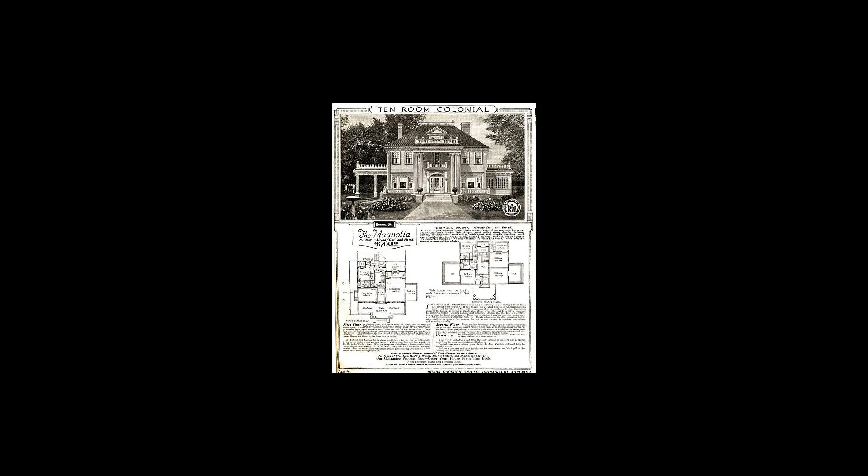Kit houses, also known as mill-cut houses, pre-cut houses, ready-cut houses, mail-order homes, or catalog homes, were a type of housing popular in the United States and Canada in the first half of the 20th century. Kit house manufacturers sold houses in many different plans and styles, from simple bungalows to imposing colonials, and supplied at a fixed price all materials needed for construction of a particular house, but typically excluding brick, concrete, or masonry, such as would be needed for laying a foundation, which the customer would have to arrange to have done locally.

Design: stick-built, balloon-framed kit houses were built as permanent, not temporary structures, as the manager of the Sears Roebuck Lumber Department explained to a United States Senate committee in 1919. A ready-cut house should not be confused with a sectional portable house, which can be taken down and moved by being unbolted. A ready-cut house is a permanent house, and the method of its construction is not different from any other frame house where the lumber is framed, or cut to its proper length, notched, etc., by hand by carpenters, unlike modular homes, which are built in sections at a factory.

In a kit house, every separate piece of lumber was shipped already numbered and cut to fit its particular place in the house, thus eliminating the need for measuring and cutting, and likewise the waste of time, especially in the days before power tools, and of materials. Thus, kit home manufacturers claim to save the customer as much as 30 to 40% over traditional building methods.

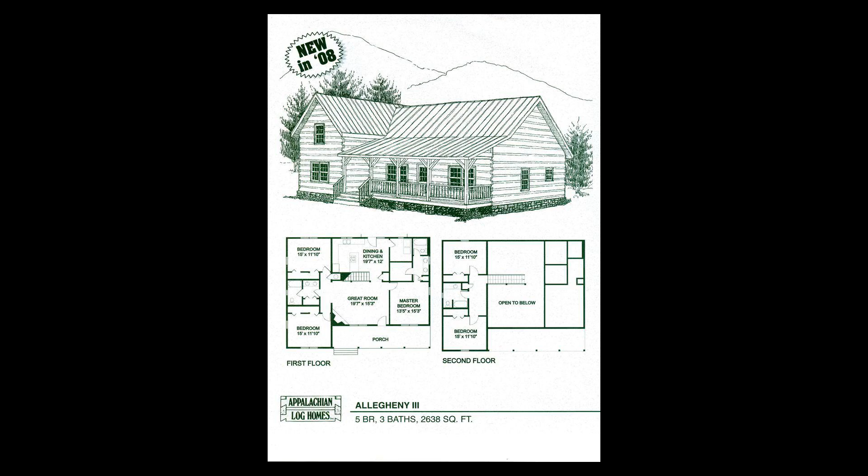This description by researcher Dale Wolicki of kit house manufacture by the Gordon Van Tine Company was typical of other kit house companies' efforts as well. All designs were standardized to maximize efficiency and reduce waste in materials and labor. Lumber and hardware were purchased in bulk. The factories had skilled employees and special machines to cut difficult pieces such as rafters and staircases. Lumber was pre-cut to length, guaranteed to fit, ready to nail, and labeled for easy assembly.

Floor joists and bridging, subflooring, finished flooring, studs, rafters, sheathing, clapboards, shingles, stucco, plaster, drywall, columns, railings, doors and windows, hardware, nails, and paint for 2 exterior coats were included in the order. Plumbing, electrical, and heating systems were available for an additional charge.

Although the lumber and hardware were standardized, the designs were not, and buyers were encouraged to personalize their order. Many models had 2 or 3 floor plans, while the exterior could be clapboards, shingles, stucco, or framed for brick. Walls, windows, and doors could be moved, added or eliminated. Porches, sunrooms, flower boxes, trellises, balconies, built-in cabinets, and a variety of door and sash patterns were available at an additional charge, as were delivery and construction, depending on the size and style of the plan.

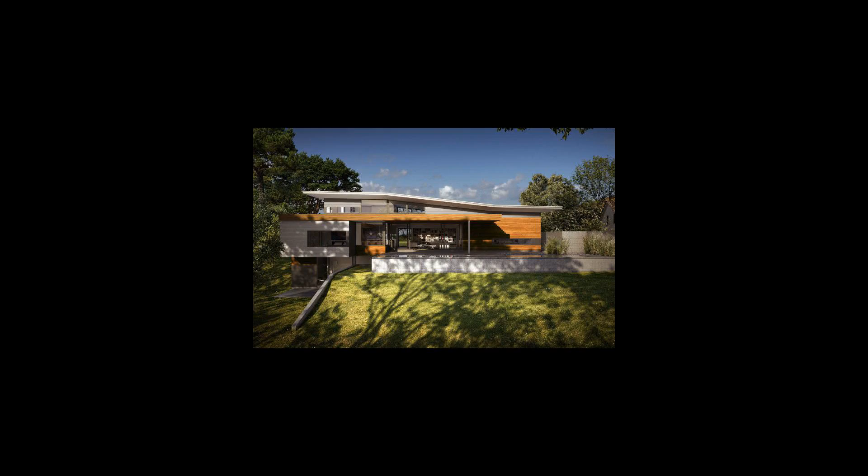The materials needed to construct a typical house, including perhaps 1,000 to 3,000 pieces of lumber and other building material, would fill 1 or 2 railroad boxcars, which would be loaded at the company's mill and sent to the customer's hometown, where they would be parked on a siding or in a freight yard for unloading. Once the materials arrived, a customer would arrange for a local carpenter or contractor to assemble the house on a piece of property owned by the customer, or a customer who was handy with tools might assemble all or part of the house himself in several weeks or a few months' time.

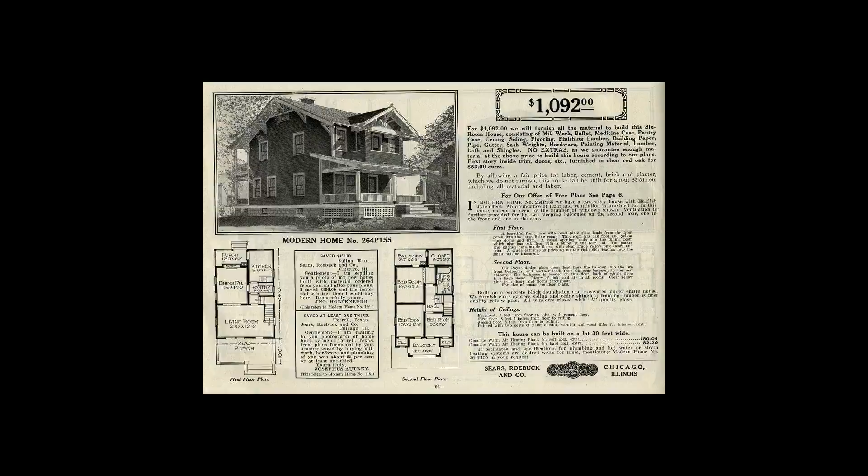The resulting houses were indistinguishable in quality and appearance from those built by traditional methods, if not better, yet were often significantly cheaper to build because of the savings on carpenters' and contractors' wages. And the cost of high-quality lumber bought from a large kit house company often was lower than at the local lumber yard.

In addition, some companies, including Sears, Montgomery Ward, Gordon Van Tine, and Harris Brothers, offered cash discounts and generous mortgage terms. For most homeowners, the complete cost of building a kit house was about double the catalog price, allowing for the construction of a foundation and labor costs. The price of land or a city lot on which to build would be another expense.

Customization: in addition to their pre-cut houses, some companies also sold only the house plans, with the home buyer purchasing all the materials locally, or non-pre-cut versions of their houses, at a lower price, leaving it up to the buyer to arrange for construction and carpentry work.

According to the Sears archives, Sears actually encouraged builders of modern homes to save money by ordering lumber from local lumber mills. Sears wanted modern homes to be cost-effective for buyers, which often meant purchasing materials locally and not from the few and geographically distant Sears lumber mills.

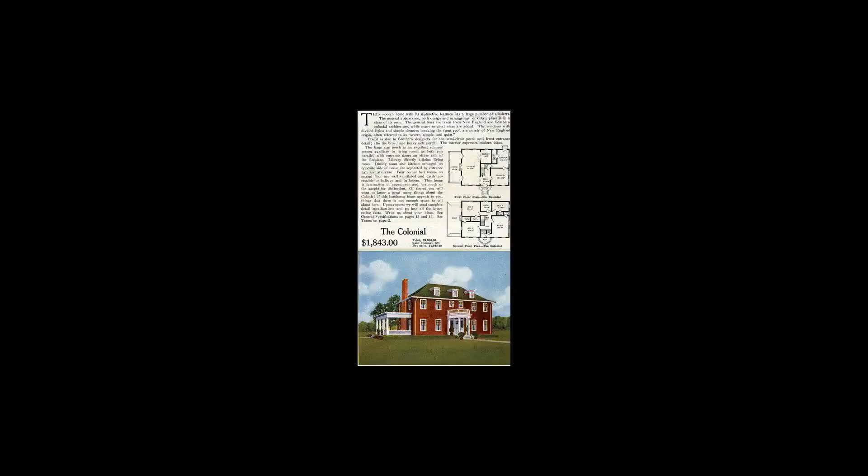In addition, with some companies, home buyers could choose the quality of materials. Gordon Van Tine offered discounts for customers who chose lesser quality siding, roofing, doors, windows, and trim. Sears offered honor-built homes with the finest quality materials, as well as standard-built homes that were best for warmer climates, meaning they did not retain heat very well, and simplex sectionals, made from prefabricated panels that could be bolted together.

Advertising. Kit houses were promoted through catalogs available at lumber yards and hardware stores, through the mail-order catalogs published by large retailers like Sears and Ward's, and through advertisements in popular magazines and newspapers in those cities where kit home manufacturers had local sales offices.

Dale Wolicki lists Saturday Evening Post, National Geographic, and Good Housekeeping as examples of magazines where Gordon Van Tine advertised. Prospective customers could arrange to inspect kit houses in their vicinity or visit the companies' factories to tour model homes.

The ease of construction and cost savings of kit houses appealed to many would-be homeowners across the economic spectrum, from blue-collar workers to the affluent. For example, in 1928 Walt Disney and his brother Roy built two kit houses made by Pacific Ready-Cut Homes on lots they owned in the Silver Lake neighborhood of Los Angeles.

The popularity of kit houses was attested in a roundabout way in the 1920 silent comedy One Week, starring Buster Keaton, which shows Keaton constructing a build-it-yourself house that turns out all wrong.

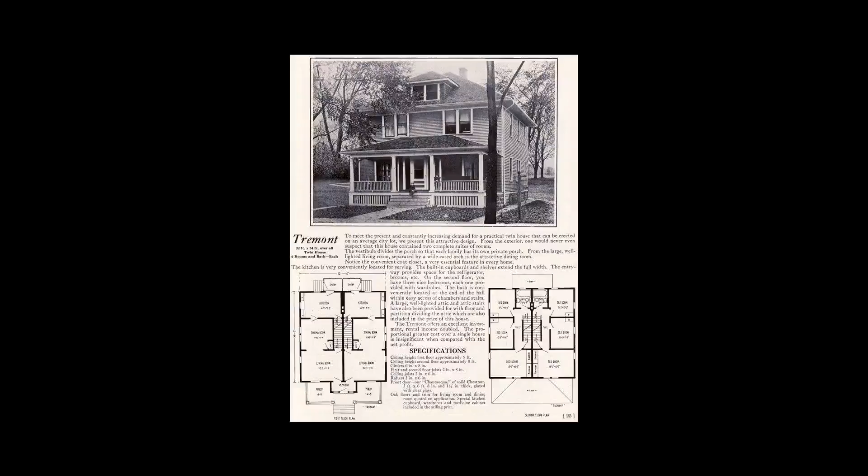Actual manufacture of homes was subcontracted to Gordon Van Tine.

Kit house companies left the business for various economic reasons before, during, and after the Great Depression. Some went bankrupt, while others returned to their original function as suppliers of building materials.

According to researcher Wolicki, contrary to popular belief, Montgomery Ward and Sears Roebuck did not discontinue their pre-cut housing departments because of customers who defaulted on their mortgages. The New Deal programs introduced by the Roosevelt administration encouraged homeowners to refinance existing mortgages at a lower rate through programs established by the Federal Housing Administration.

Throughout 1934 and 1935, customers paid off their home mortgages with Sears and Montgomery Ward. Without the profitable mortgage program, Montgomery Ward decided to discontinue its offerings of pre-cut houses and building materials entirely. Sears Roebuck continued to sell pre-cut houses but scaled back their operations significantly.

Some kit house companies continued after World War II, but most home buyers flocked to the new, inexpensive tract house subdivisions springing up across the country.

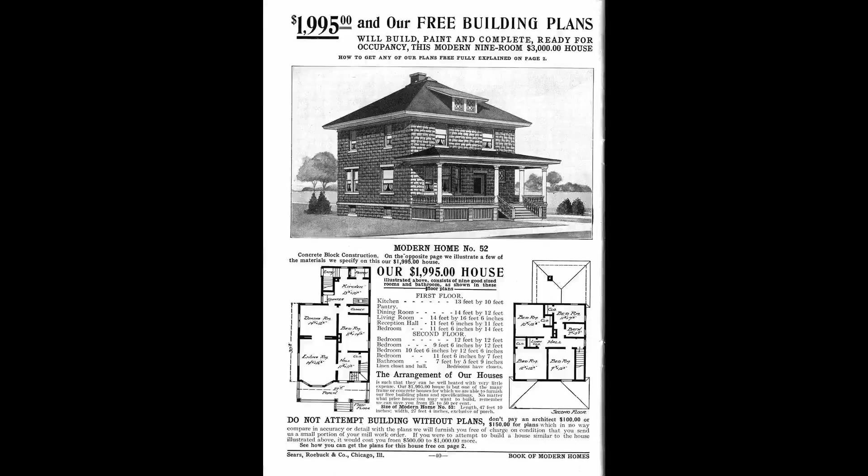Preservation: The Municipal District of Acadia, Alberta, has published a map of a self-guided driving tour of local catalog houses. See also: Kit Houses in Michigan, Mansfield House.

Bibliography: Schweitzer, Robert, and W.R. Davis. America's Favorite Homes: Mail-Order Catalogs as a Guide to Popular Early 20th Century Houses. Detroit: Wayne State University Press, 1990. ISBN 0-8143-2006-6. Google Books preview here.

Stevenson, Katherine Cole, and H. Ward Jandl. Houses by Mail: A Guide to Houses from Sears, Roebuck and Company. Washington, D.C.: Preservation Press, 1986. ISBN 0-471-14394-4.

Thornton, Rosemary, and Dale Wolicki. Montgomery Ward's Mail-Order Homes: A History and Field Guide to Wardway Homes. Gentle Beam Publications, 2010. ISBN 0-9715588-6-8. Aladdin Homes Company Archives at Clarke Historical Library.

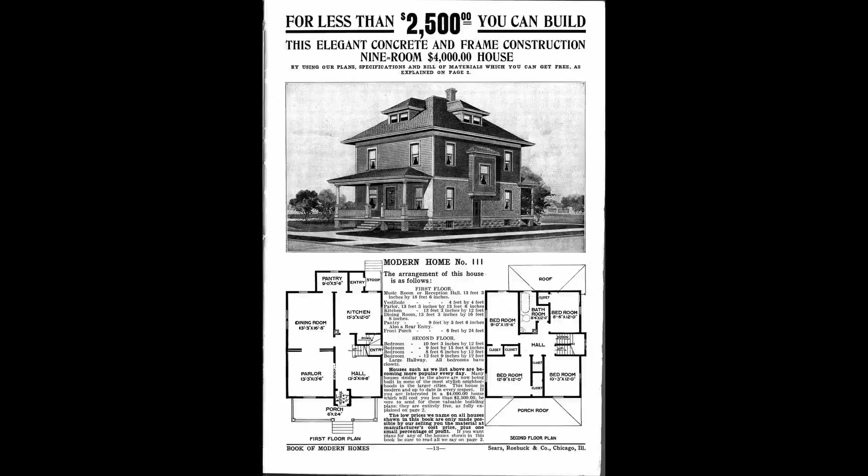Central Michigan University includes complete sales catalogs from 1908 to 1954. Bungalow floor plans at About.com. Home plans by Sears and a few other companies, 1908 to 1921. Eaton Catalog Homes webpage with images from the 1917 Eaton's catalog, along with blueprints of a large Eaton's house actually built at Lone Star Farm near Sperling, Manitoba, which is still in existence today.

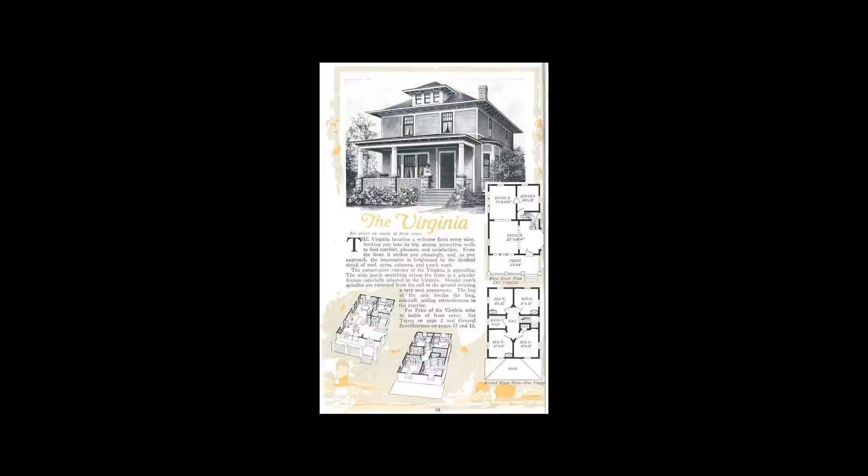Eaton Catalog Houses, a documentary about Eaton homes featuring Les Henry, author of Catalog Houses: Eaton's and Others. Gordon Van Tine website by Dale Wolicki includes much company information as well as photographs of GVT homes as they appear today. House plans from books and kits, 1900 to 1960, at Antique Home Style. Kit Homes information includes information on Green Kit Home Building.

Kit Home information at the Arts and Crafts Society. KitHouse.org, historical information and extensive bibliography on kit homes by architectural researcher and author Rebecca Hunter. Kit Houses Research Guide at the National Trust for Historic Preservation Library Collection, University of Maryland, includes bibliography.

Retrieved 5 August 2013. Mail-Order Houses: A History of Canadian Mail-Order Catalogs, from the Canadian Museum of History. Sears Modern Home images at SearsArchives.com. SearsHomes.org by Rosemary Thornton.

Researcher and author of several books on kit homes. Sears Homes of Chicagoland features kit houses in the Chicago, Illinois area, steadily enlarging demand for ready-cut houses. The American Exporter, Volume 91, No. 4, October 1922, pp. 73-75.